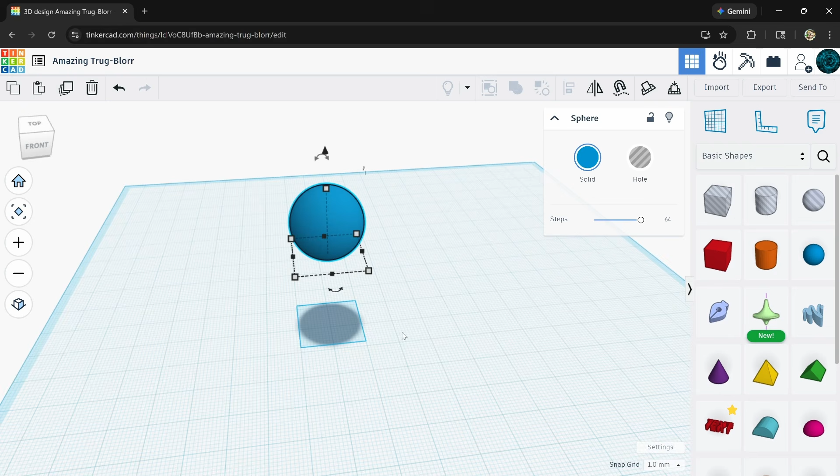Guys, I talked about it days ago, I want to make a new articulated joint. I've been thinking about it for a while but didn't think much of it. I don't know quite how we're going to do it, but it's going to mimic one we did months ago. We made a super cool articulated joint, a brand new one the world has maybe never seen, when we did that caterpillar. We've done a couple caterpillars, but the cool caterpillar with like 30 different joints was the best articulated model I've ever made.

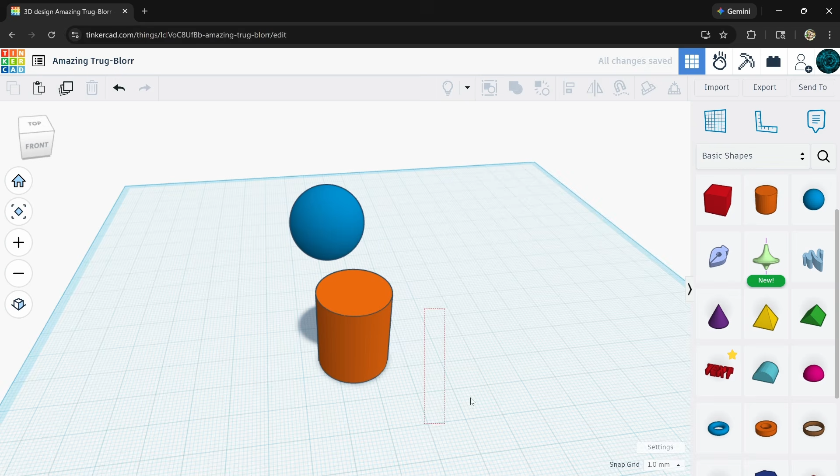We're going to do a similar type of joint, but that one actually used a cylinder for back-and-forth motion, side-to-side motion like this. We're going to try to make that same shape of joint, but using a sphere, more like a ball joint I guess. So why don't we just get started? Now that I did my announcements, everybody can come back. Everybody probably just skipped it.

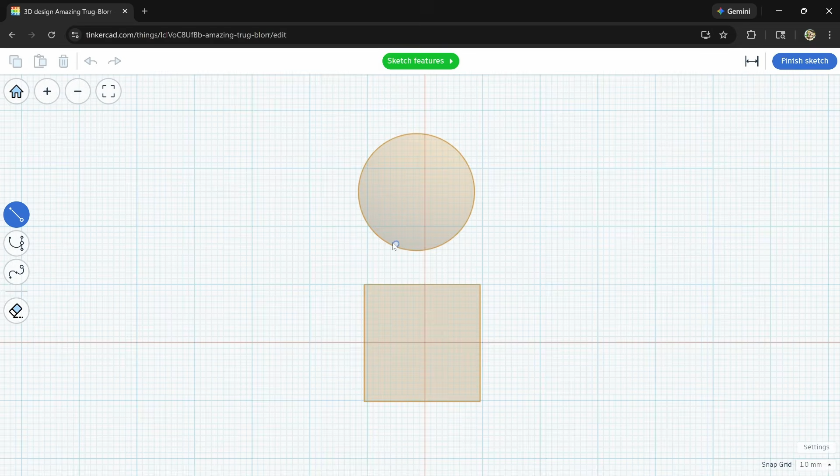Okay, let's decide what we want to do here. We have to make sure it's printable with no overhangs, so the bottom of the sphere is an overhang. Let's grab the sketch tool, let's see if it will help us out. I'm going to bring a temporary block down right here, and set the sketch tool on the side of it. We can use the sketch tool to draw stuff. I am so smart.

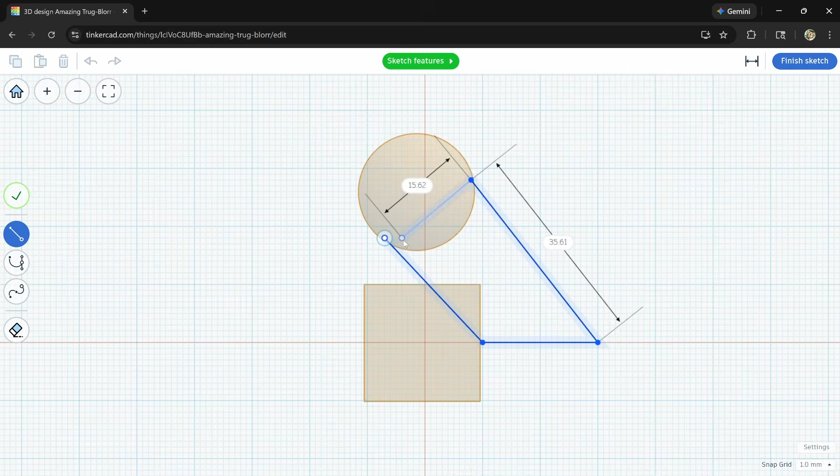Oh dear, okay let's just do stuff. Let's draw some support for the ball. Oh, but that support's going to have to be farther back. Okay, see, until I start actually doing it, I don't really know what I'm doing. Okay, let me move this back. And what we're going to do is cut some of the ball off, aren't we?

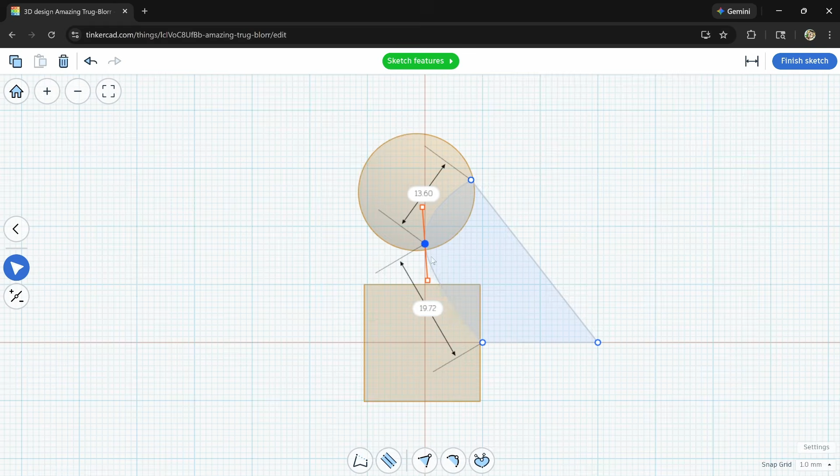Let's go ahead and hit finish sketch on that. I don't really know if this is what we want yet. Actually, let's add a little curve to it so it's more pleasing to the eye.

This could have a curve too. Let's just hit finish sketch on that once. Okay, so see, that can get installed on our joint. We'll align it later, but see that could go there, all right?

But see, this is an overhang right here. But we're just going to chop part of the ball off. That was part of my idea. So let's grab another sketch tool. This is one way you can make your own shapes to cut stuff off.

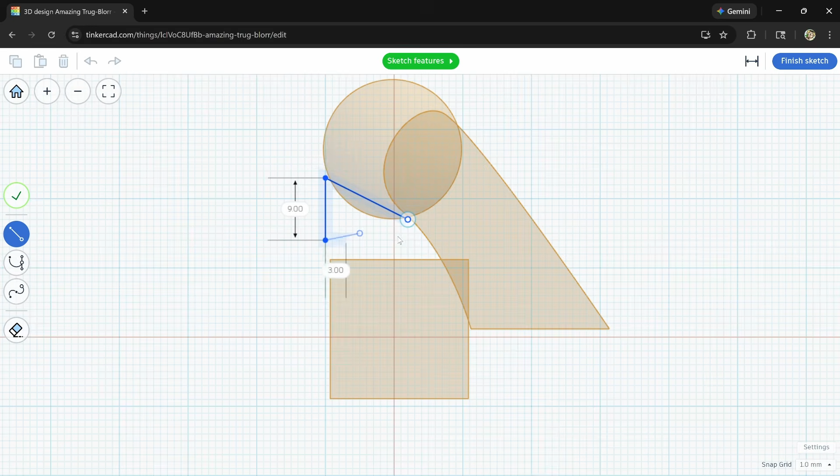Let's pretend we just want to cut. What do we want to cut? Yeah, let's cut from here upwards like this. Okay? So see, we're going to cut off this bottom part of the sphere. And all you have to do then, hit finish sketch.

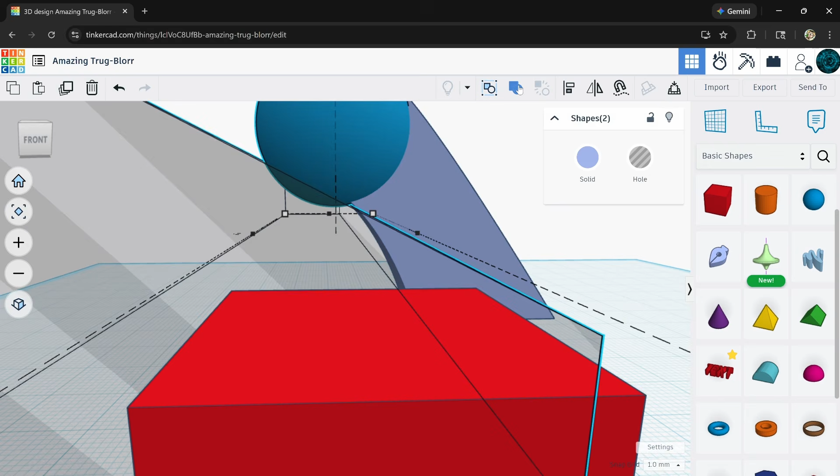Stretch this over past the sphere and turn it to a hole. See? It's going to cut that out just like we drew it. So let's group it with union, group it. See? Beautiful, beautiful. See, that shouldn't have trouble. That shouldn't have trouble printing.

Maybe this little part right here. So let's move the ball back. And let's align this now.

Yeah, I'm so happy. I missed tinkering. I have coffee, I do not. Well, I have a tiny headache, but it's fine, it's fine, it's fine. Maybe I should take some aspirin also.

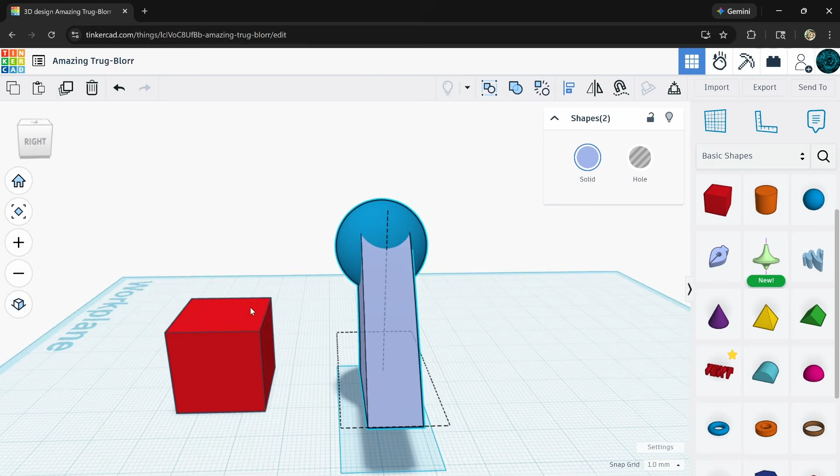Okay, are you guys seeing this now? We would have to lock this in. We want to make sure that this almost seems like it could be smaller, this part of it. Like a little more dainty, like that.

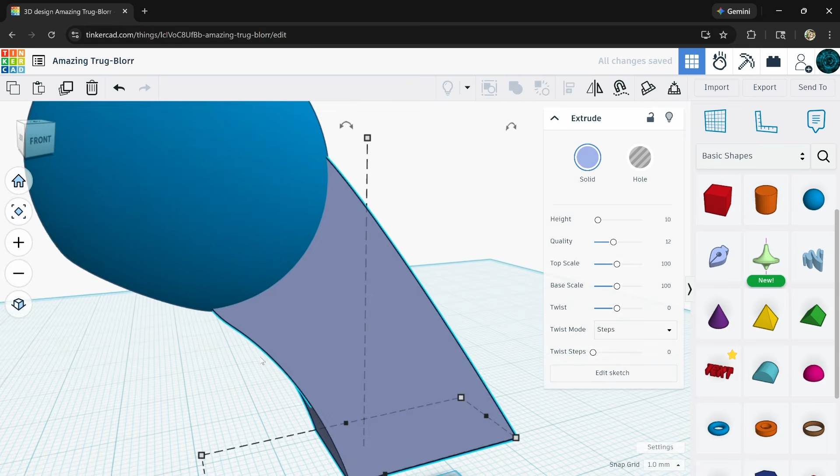I see no problems with that being able to print as a standalone, you know? Okay, let's hit D to drop it so it's on the floor. Okay, and then I just thought of something.

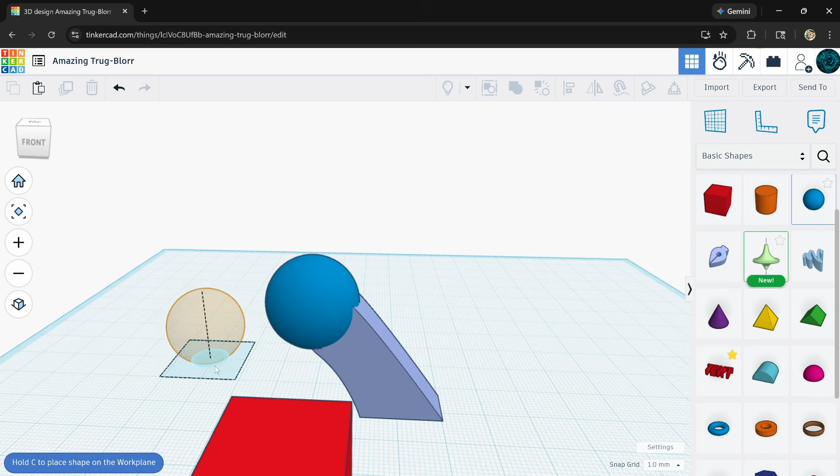Well, let's just grab another sphere, I guess. Let's grab another sphere. I should have duplicated that before we cut the sphere, but it'll be okay. Let's grab another sphere, make it a little bigger.

Like this. Oh wow, I don't even think I have to align it. It's already good. Okay, look at that, I aligned it without the align tool.

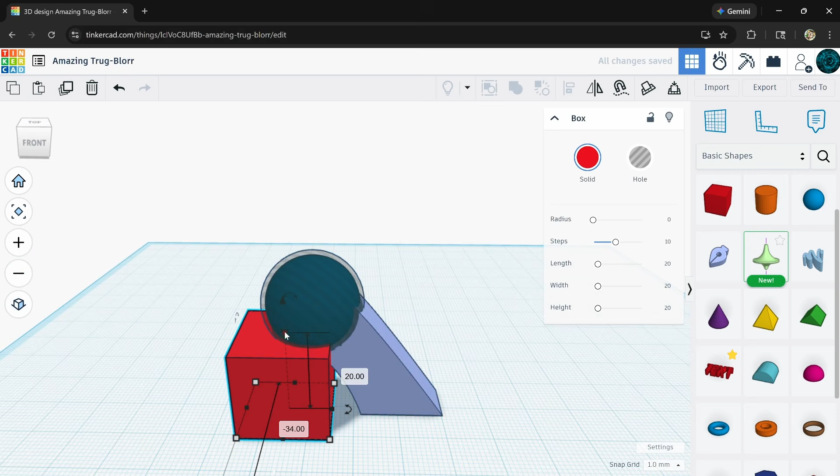Okay, so see, we're going to use that to cut into the object that's in front of it so the joint will work, you know what I'm saying? So let's pretend we're adding the joint to something like that. See? We're just going to cut into it like that. Well, here, let's just do it. We're just showing an example.

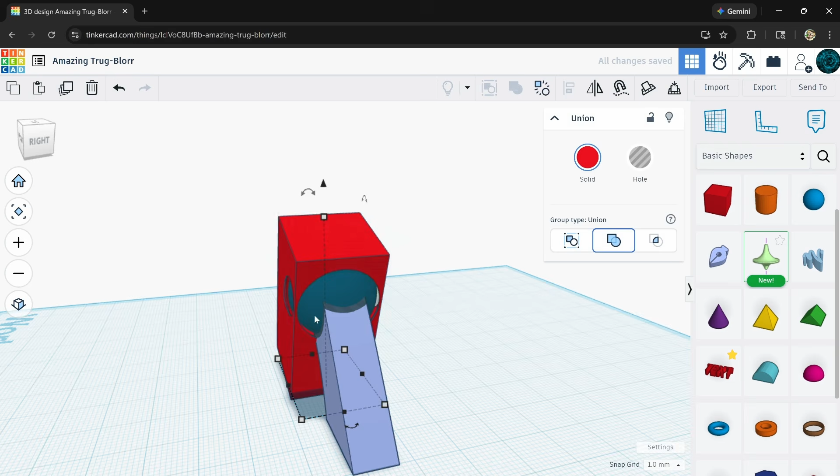Let me duplicate it here. Okay, so group, see, look. That's almost a working joint, because we have it a little screwed up. But see, you get what I mean. So see, that would move in there and we'd be all good.

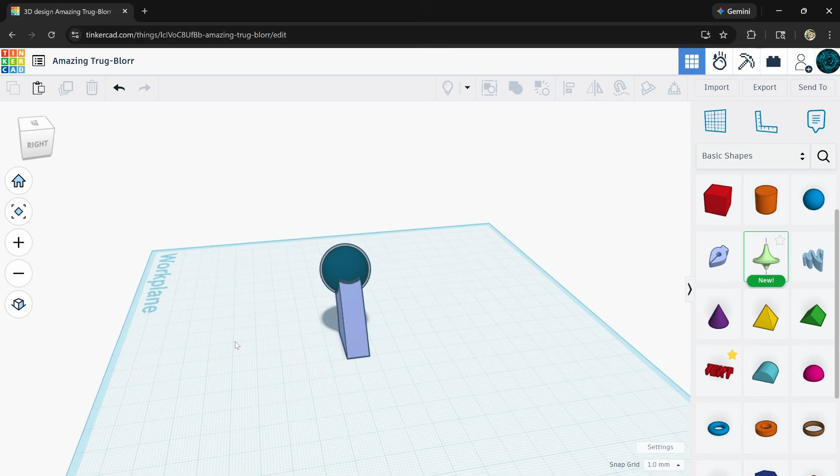So I think we're good then there. We could also, I want a pretty big footprint on the bottom, because we don't want it to pop off the print bed, you know?

Okay, so now let's make a shape for it to go into here. So we got that part done. So what kind of shape do we want it to go cut into? I don't even know what we're making. Are we going to make like a lizard or something?

I always wanted to make a slug. That's not much different than the caterpillar, though. Let me think of what we're going to do here. It might take some futzing around. I don't really know.

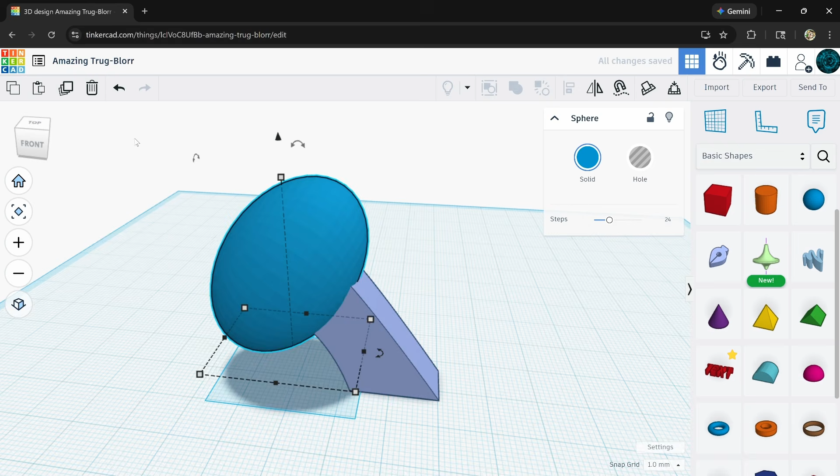Something like this could work. We got to be on the ground, though. What's cool is when you come on here without a plan, brand new cool things can happen, you know?

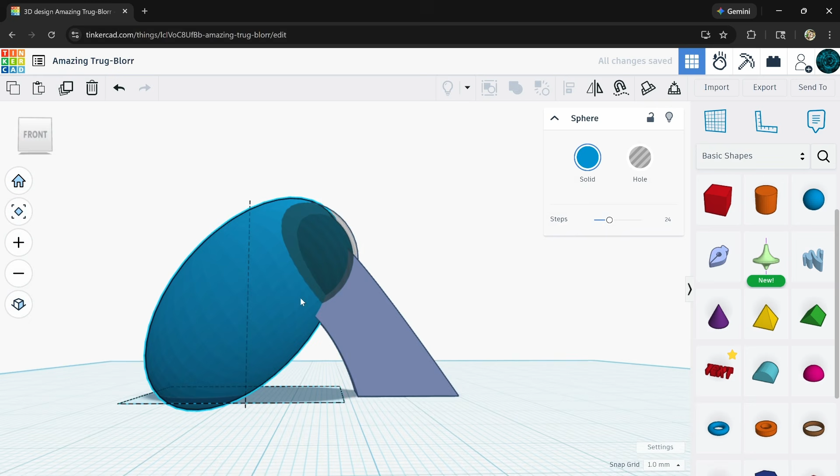See, what if we had it cut into something like this? That would need a flat spot. Okay, we'd have to get rid of some of that. Would that even kind of work?

Can we just, let's align it here. It's already aligned, wow, everything's behaving. We're going to hit the back button, but let's just group it and see what it looks like. See, we'd have a problem here, but

That would slide right out, wouldn't it? So we need it to come around a little more. Okay, no problem, I know how we can do that.

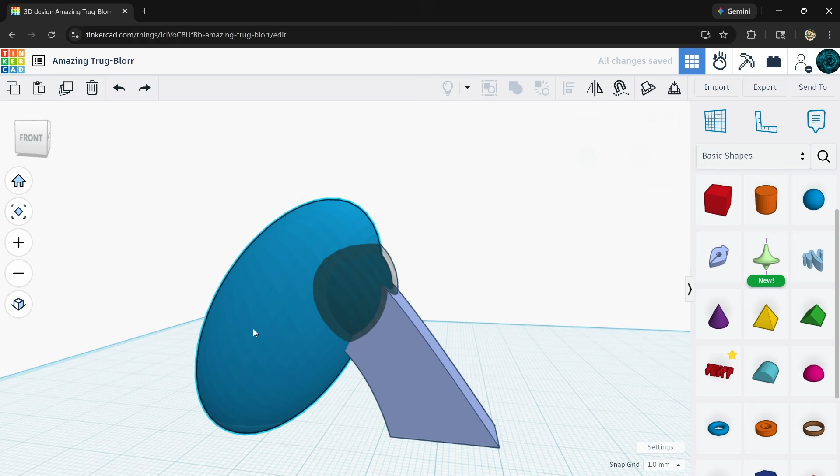We can just go like this. Let's duplicate this sphere. Duplicate. We're going to bring her on up. I could have just grabbed a different sphere, you know what I'm saying? Why don't we just do something like this?

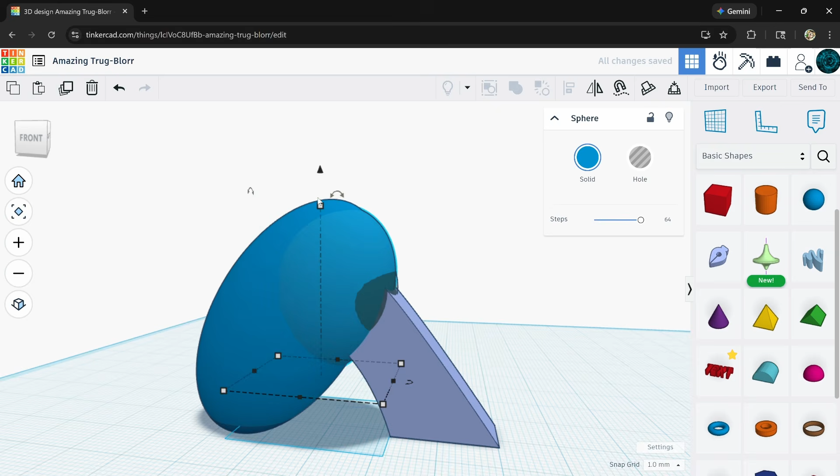I hope something cool, I hope the thumbnail's cool. What did I make? Can somebody from the future tell me what I made?

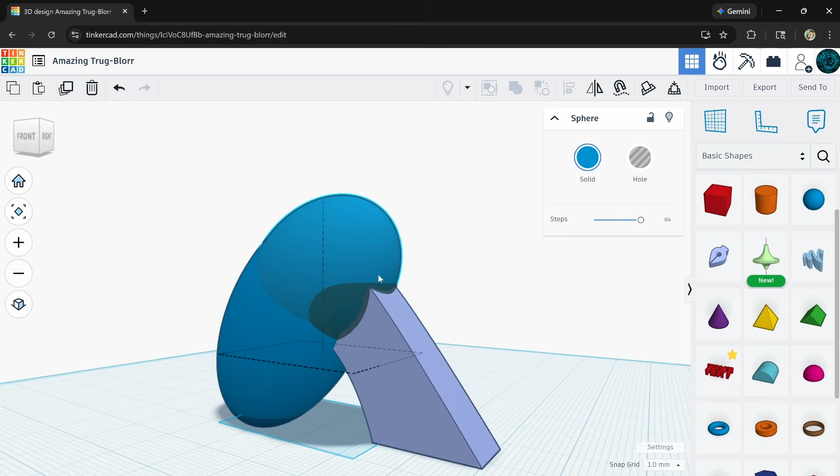Okay, let me do a little time lapse. I'm gonna screw around with a few things and figure out what we want to do with this, how we want this joint to fit. Okay, that wasn't much of a time lapse because I think I kind of like what I got.

Was all this stuff centered when I did that? It was. Okay, we got this shape. That ball can't pop out of there.

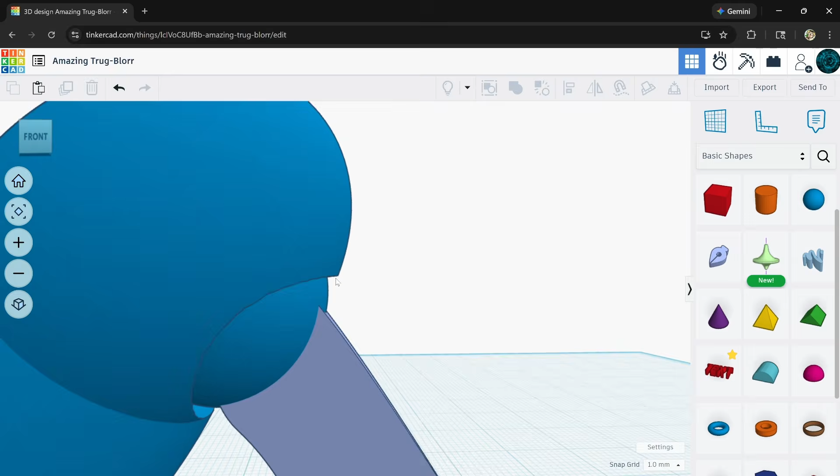Little bit of an overhang. This is gonna print a little weird up here, maybe. Might print a little weird at the top right there. So now, what if we just do this, guys? Duplicate, slide her on back.

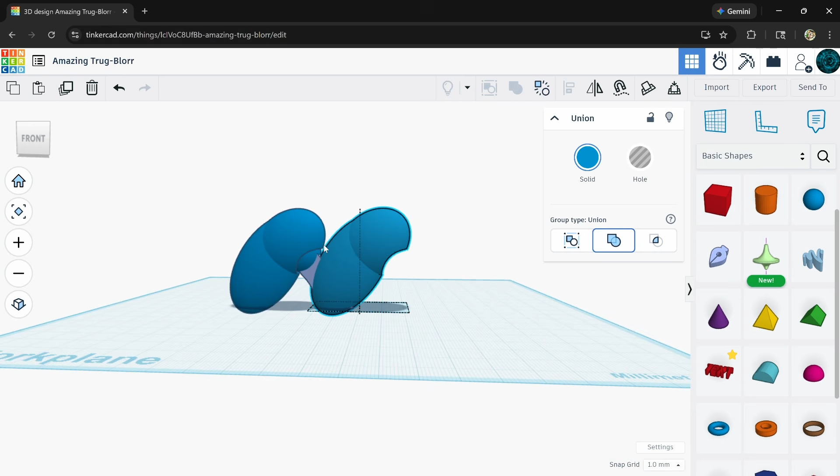I take that back. Wow, we'd have a weird thing happening if we just did this. You know what? We're going to try multiple things because I don't even know where this is going yet. But one thing that is already cool is this.

This is a completed joint right here. We could line these up and, besides chopping the bottom off, let's add a little more bulk to the bottom quick so it'll stick to the bed better. You know what I'm saying?

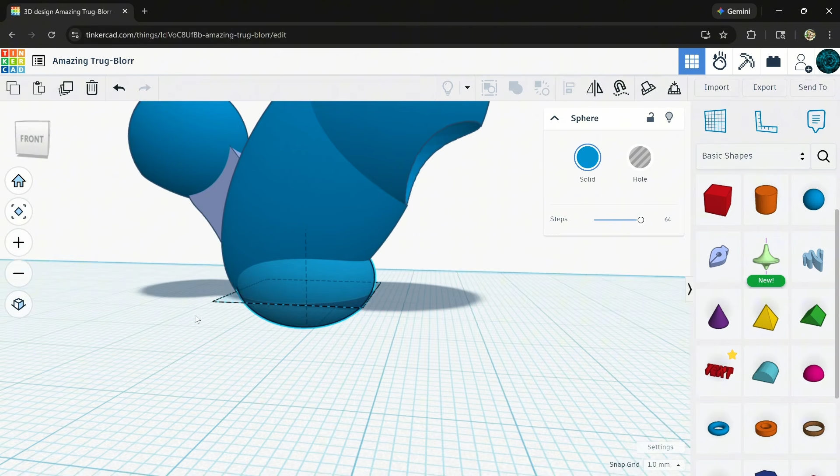This is funny, I don't even know what this is. Okay, and then we would chop it off, but maybe we don't need to yet. So you get what I mean. This even would be a repeatable joint for like a weird looking snake or something. Let's just see what it would look like.

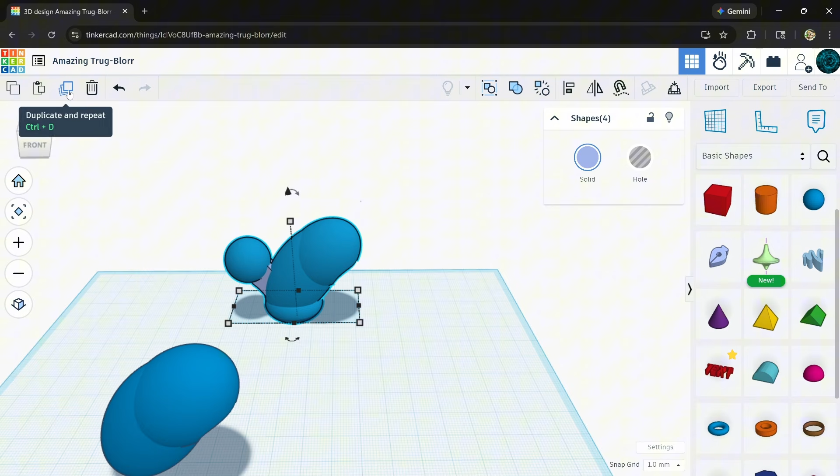See, we just duplicate it, slide it back till it fits. Which is right there. Yep, and then watch. You know, we could just keep hitting duplicate. See, we made a really cool...

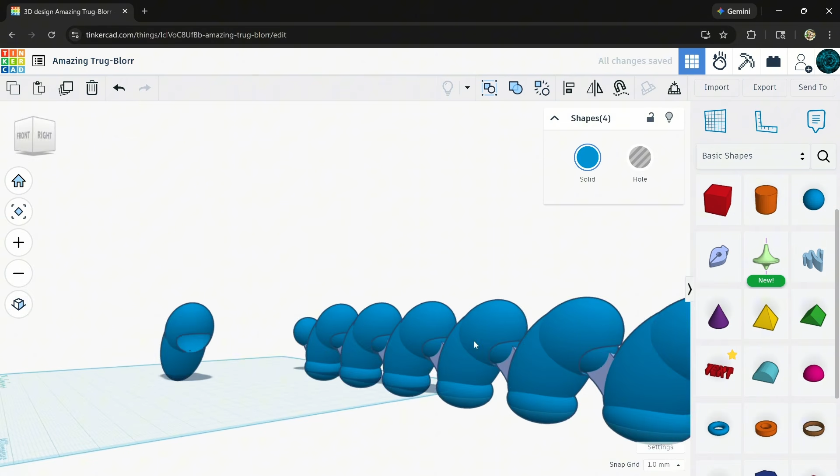That would be really flexible. Oh my gosh, these would turn all the way around. Oh, that's goofy, these would all spin like all the way around. That's cool, I wonder what we could do with that.

But see, you're kind of seeing the joints kind of exposed. I wonder if we could do something else so it's not so exposed. So let's keep that weird chain for now.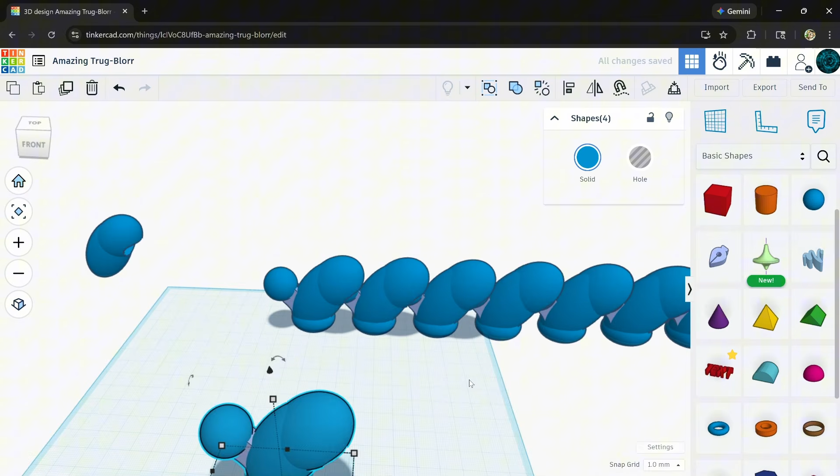That might even be cool to print to see how it feels and moves. It's literally going to like spin. Interesting.

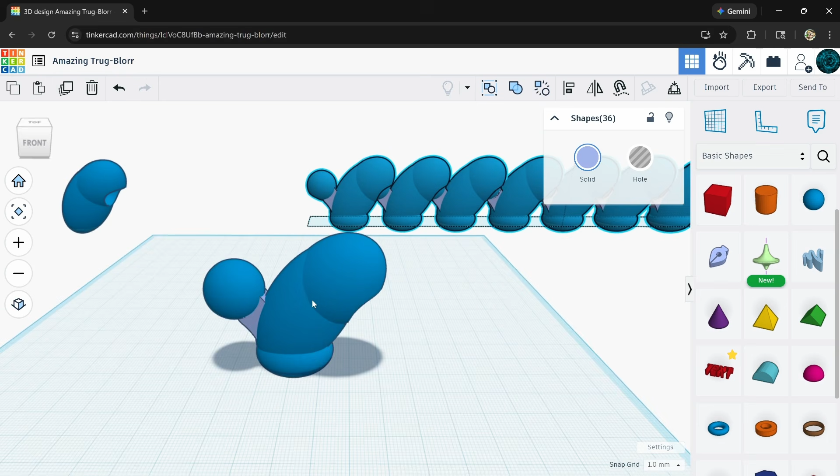Okay, let's do a little, I'm going to do another little time lapse where I try to fit this together in a different way, and we'll see what happens.

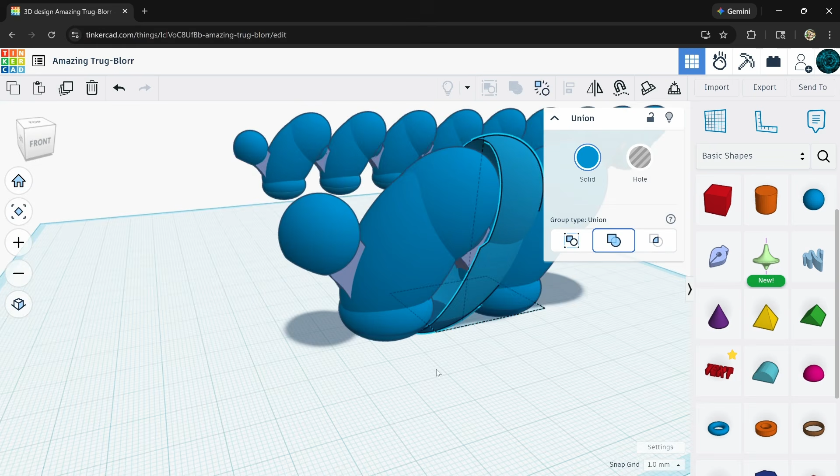Okay, we're getting really weird now, which is good. That's always a good thing. How skinny is this thing? Okay, no, that's good. Are you guys seeing this? It looks weird, don't it? So look at how goofy this is.

This is technically another one. This hides its joint a little bit more. Let's try it out, let's line it up just like the other one. So just duplicate it, slide it over till it's where it's supposed to be. Uh-oh, that's harder to see.

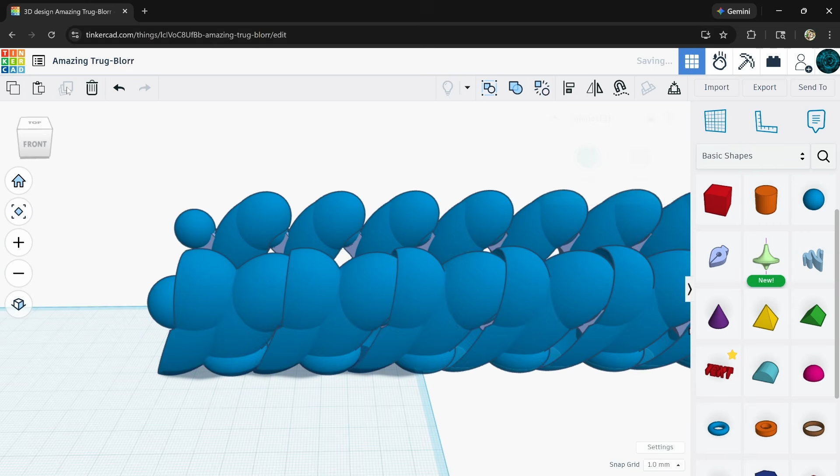I think right there. And then keep hitting duplicate. Whoa, weird. Wow, that is really weird, nobody's ever made anything like that. See, that's why we come on here with no plan. But is that cool? We don't know.

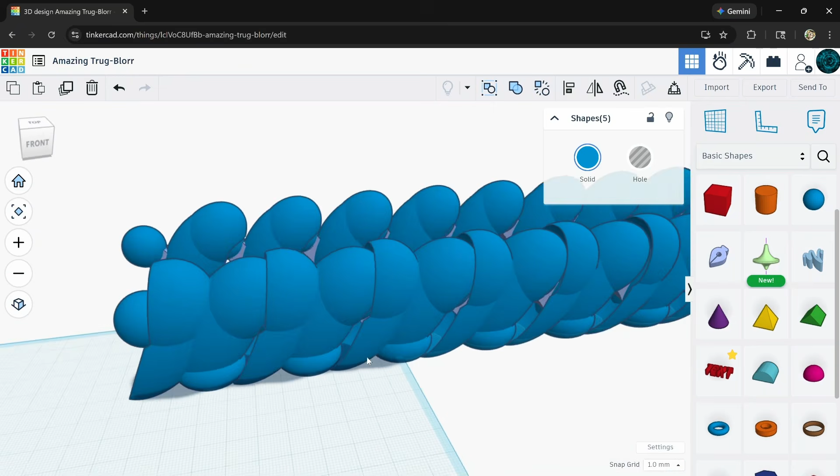Wait, are these touching? They are not touching. Oh my gosh, we almost have to print this. Should we call it rope? So here, let's get rid of this. Oh, I mean, set it over there.

Let me take a look at this little thing. I feel like I don't want this to be the only finished product, though. Maybe we won't do a full creature, but we should test out. We got to test one of these out for sure.

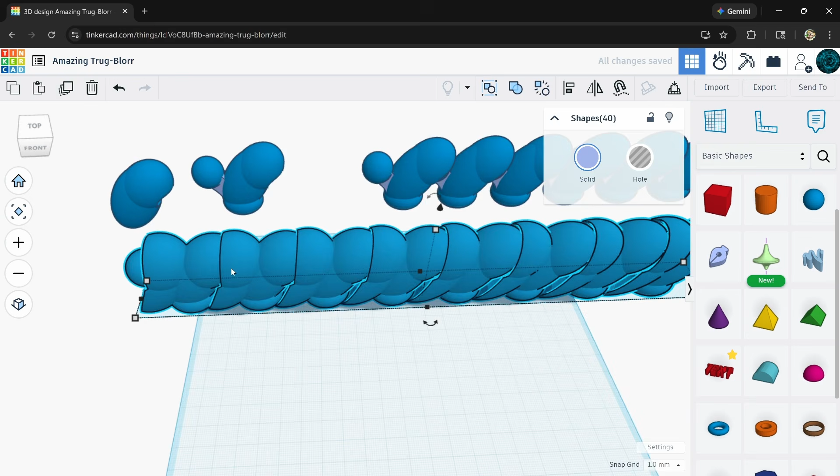This one, I really want to see how this moves. This would spin all the way around, too. It might almost have too much movement. Every joint would be able to spin all the way around. But is that good or bad?

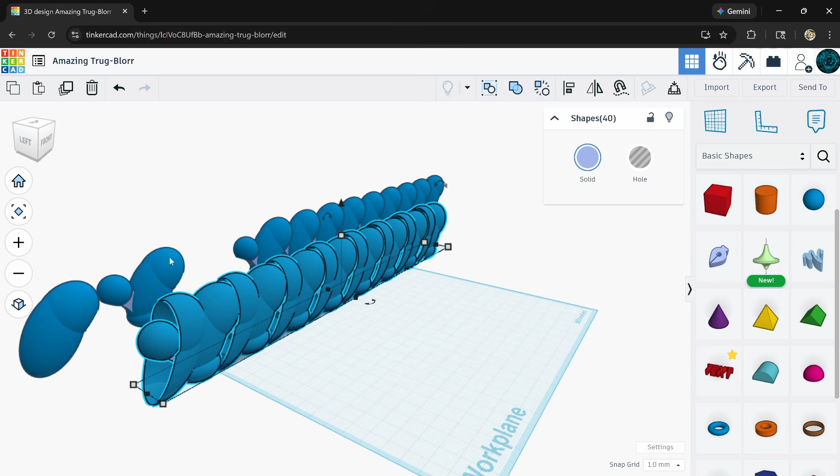Maybe that should give us more ideas. Knowing that that's how this joint's going to work, maybe we should take that to our advantage. Okay, let's do another one. Okay, let's think of something else to do. I will speed this part up too.

Oh my goodness, please tell me you're seeing this. What am I doing? This might be awesome. Okay, so what would we do? We would... okay, so let's cut this into this.

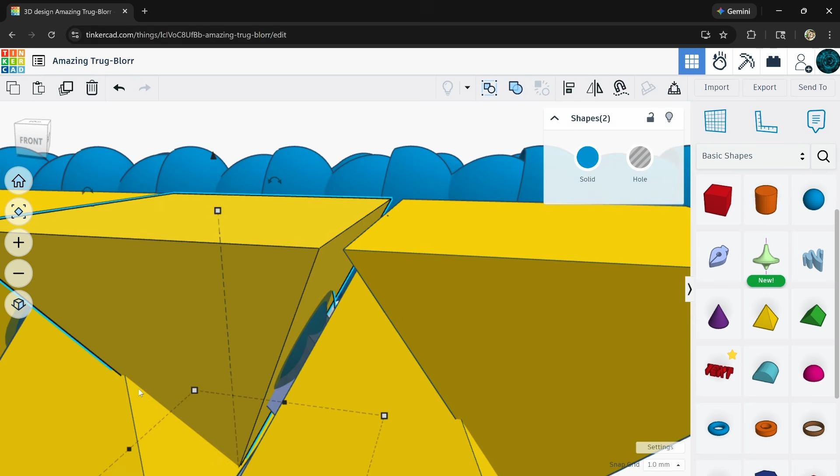Select this just in case. Okay, so we have our hole cut there, which means we could delete these. Whoa, wait, whoa, okay, get rid of that one. Wow, this might be crazy.

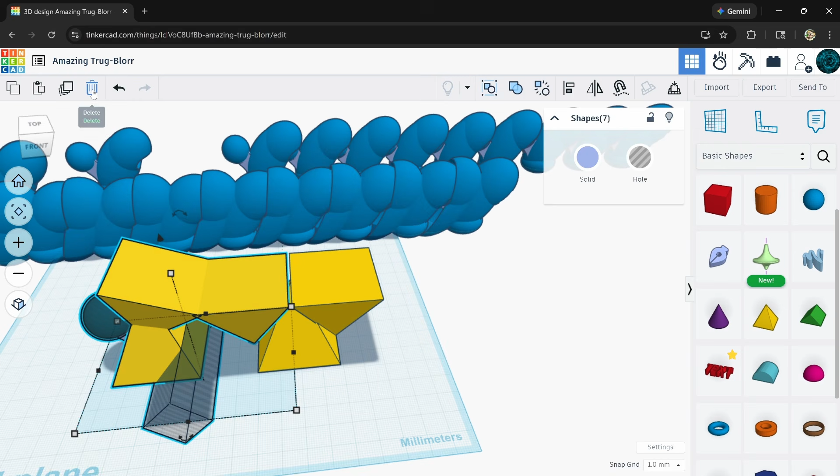If it spins all wacky, it'll be more like a fidget toy or something. I don't know, so what would we do? Delete these. Delete this. There, oops, I think this is a finished deal.

Let's have a look. Wow, it's got a big, huge footprint. That's actually really cool. Okay, so watch, if we just duplicate this, same as like we did with the other, and bam. Oh, it's hitting in there. Oh, duh.

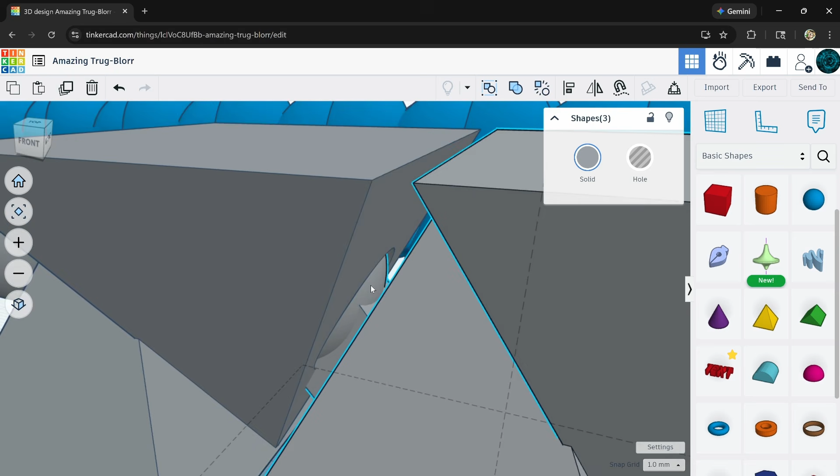Okay, I have to fix that. Okay, this is hitting a little bit, let me fix that. Is that all I had to do is slide it back a tiny little bit? Or is that going to fall right out?

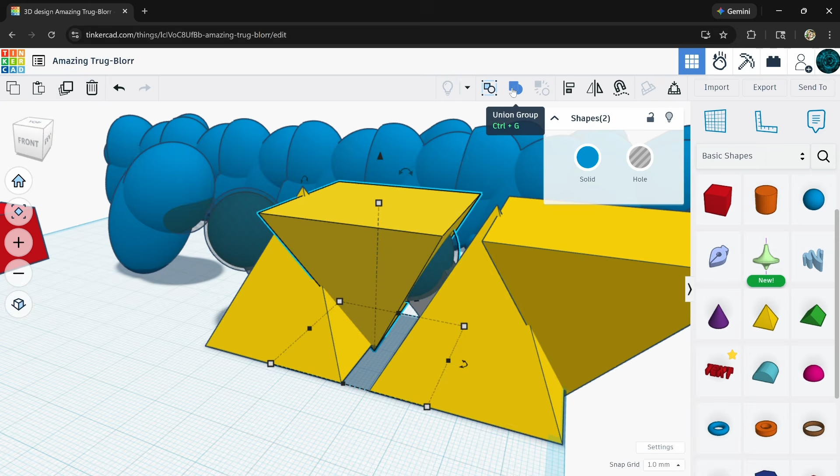We could check it, so let's cut into this. I started doing all kinds of crazy stuff, but maybe all I had to do was... oh wow, is that all I had to do? Let's check if it's going to hit.

So we can turn this into a hole, and let's check if it hits. Whoops, let's move this all as one.

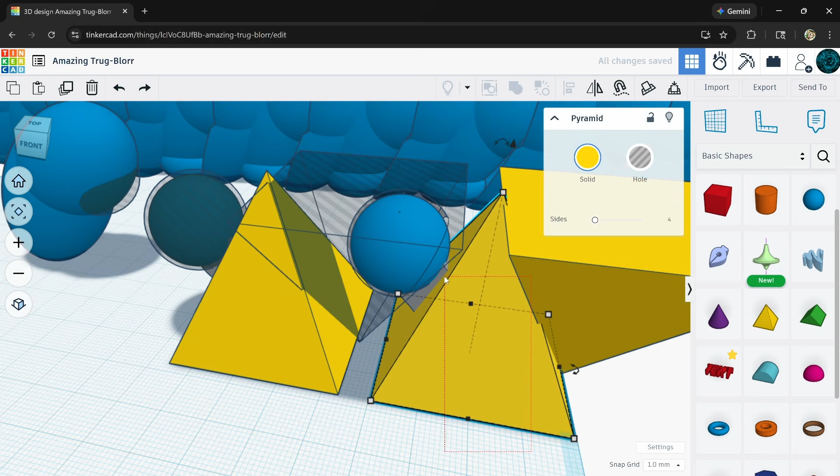Okay, oh, just barely though. It doesn't look like it could fall out, but it's a little bit of a close call. So let's make a quick change, let's make this a tiny bit smaller. Let's make our movements 0.5.

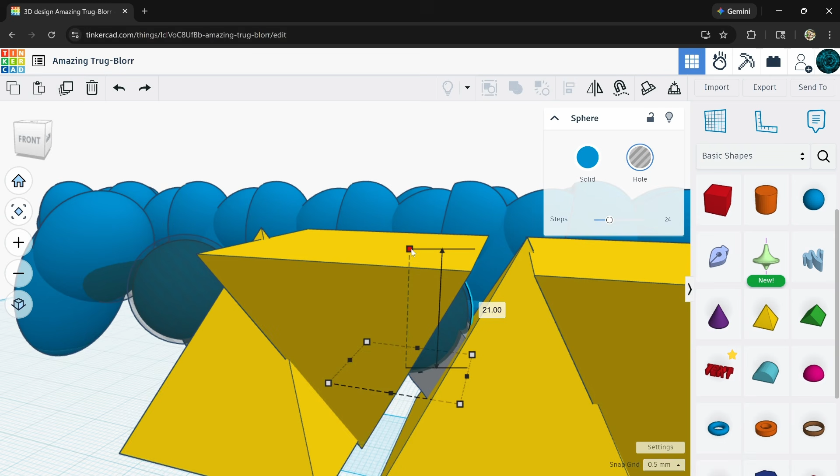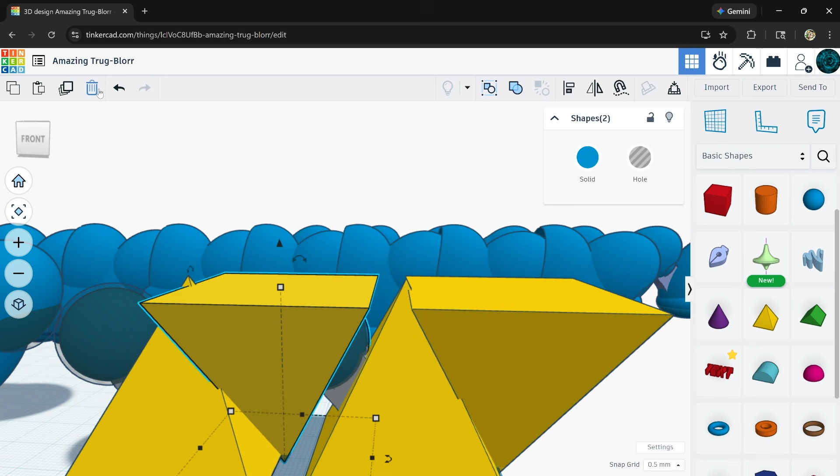Let's do that. Is that still... Okay, yep, that's okay, hopefully that'll give us enough clearance. Okay, let's cut it into there. We might be done, guys. Cut. Okay, that's not going to fall out, and that's going to be able to turn all the way around.

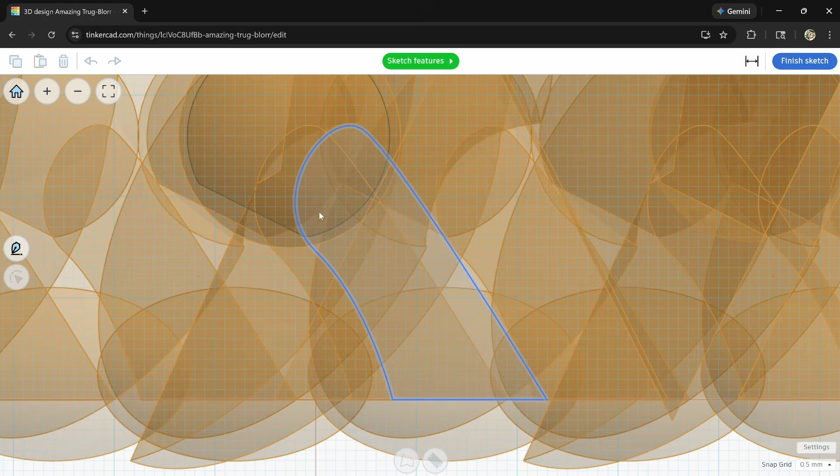Oh yeah, we can make a slight change to this. Let's go to Edit Sketch. It looks complicated, but here, let's bring this up half. Let's just pull this back a little bit like that.

Beautiful, beautiful. Oh my goodness, guys, that was a little wild. Oh, see, no wonder my head hurts, I'm thinking too hard. We got this.

Okay, let's line this puppy up and see what it looks like here. So delete the stuff we don't need because it's in my way. And did we cut already? Oh yeah, we did, okay, get rid of that. Okay, so this is a finished object that we can...

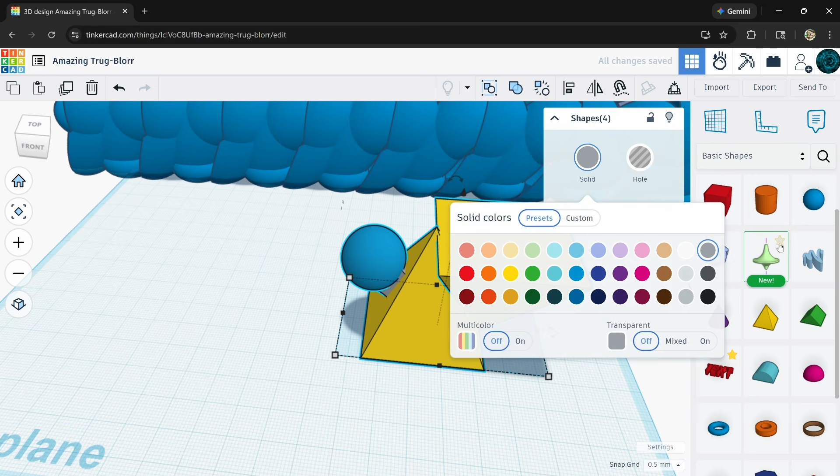Can't we make it all one color? What the heck, let's just group it then. There we go.

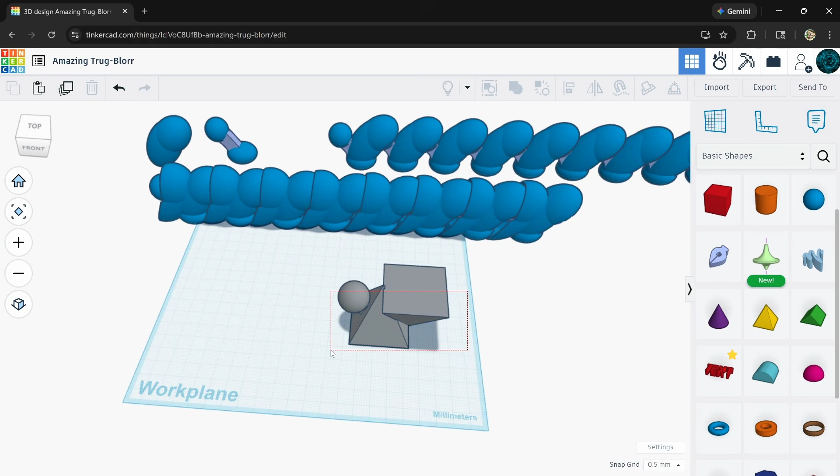Now, is that going to spin really cool like a weird fidget toy? I'm just trying to picture what applications you could have. There's going to be a flat side on each side. Could we make it into a calculator? You could have numbers, there'd be numbers that you'd be able to spin. Can we use it as an abacus, guys? I have no idea. Okay, let's try it out here though.

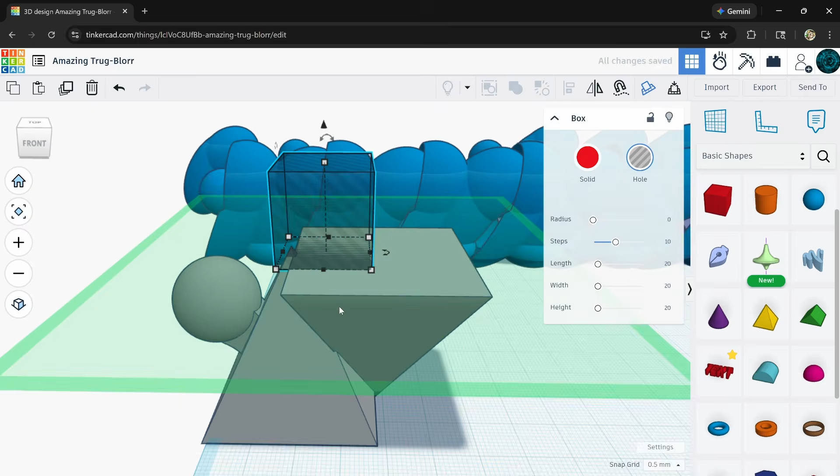See, we'll just slap it back like this. I think we should cut this triangle. Oh yep, let's do that. We're gonna cut this little tip off right there, don't you think? Yeah, you think.

Groupage. Let me see how long I've been recording. 44 minutes, a lot of that's going to be a time lapse, or I mean some of it.

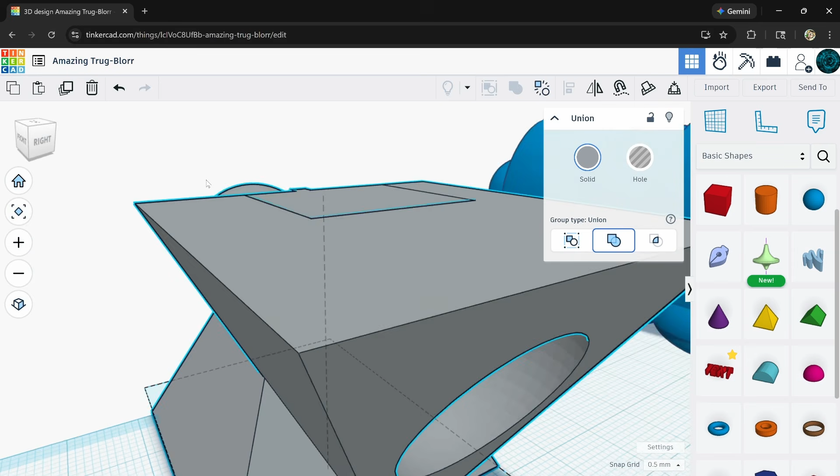What the heck, why is there so many lines? Them are imaginary, right? I don't trust that, why does it look like it cut into it? Let's... Oh, it's flush, that's imaginary. Here, we'll just go like this. Ah, smart, smart, smart. Okay, group.

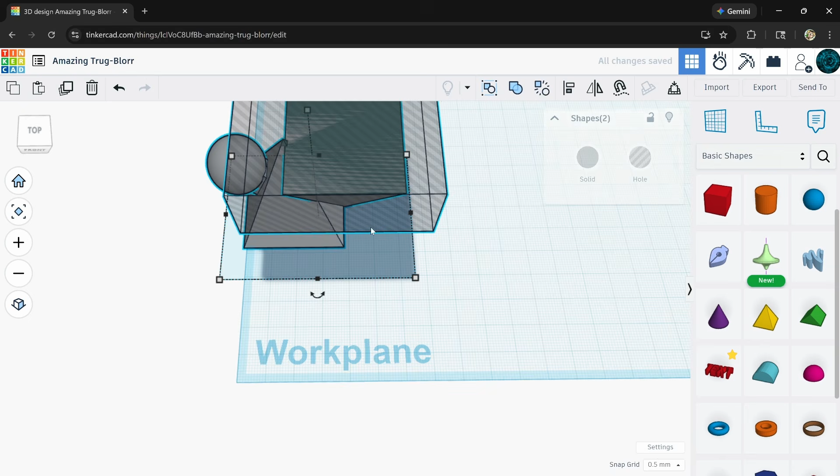There we go, guys, have you ever seen one of these before? Oops, we got to cut that little bottom one off too. Let's just duplicate this, hit D to drop it. Pull it down like this. See, we're going to cut that bottom off now too. Okay.

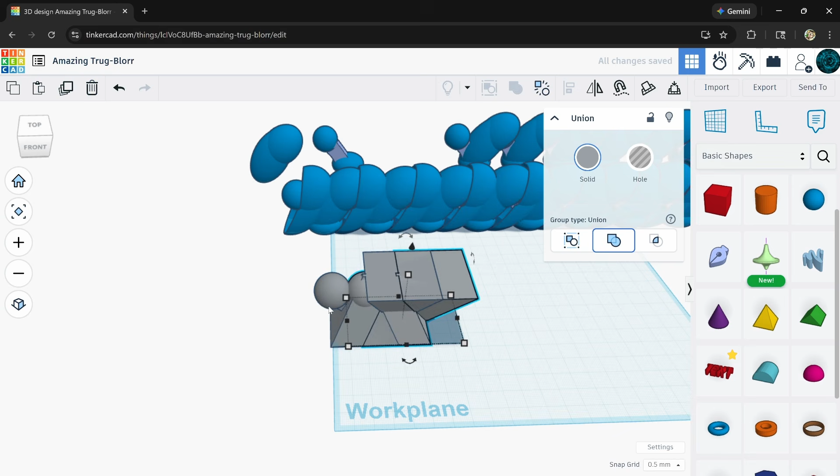Wow, these are weird, okay, let's see what it looks like lined up now. Can we use it as an abacus? You probably could if you strung some together. One step at a time, guys. Let's see if it even... We got to print some of these and see what it does, you know?

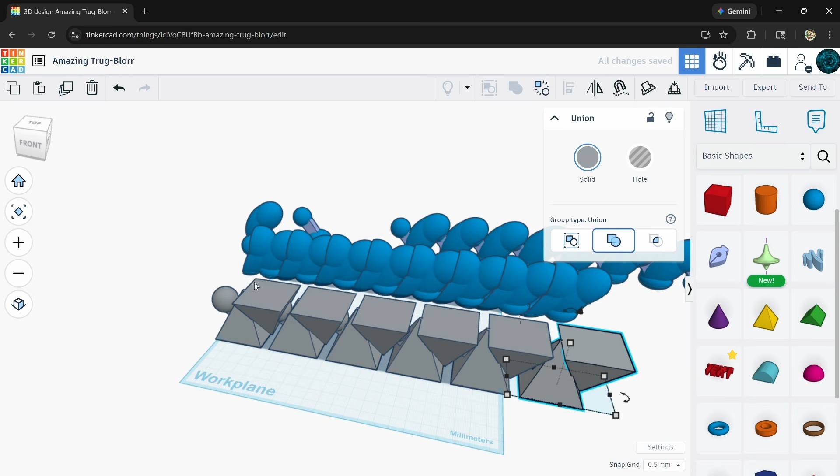Okay. Wow, that looks tight, is that it though? Let me hit duplicate a few times. Okay, that's really cool though, I mean, for one thing.

Let me do one more as our... let's save one over here. Let's have a look inside here and see if it's hitting. Oops. Oh man, it's not hitting, but...

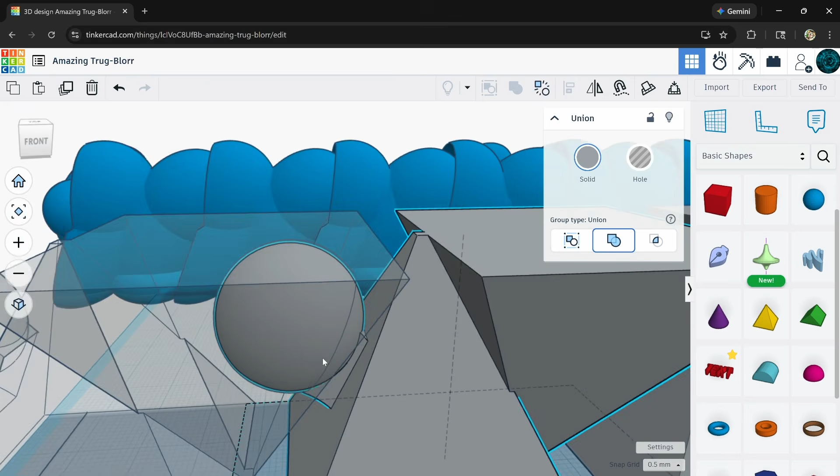That's way too close. It's way too close, isn't it? It needs to be looser than that, doesn't it? Okay, let me get it a little more gooder.

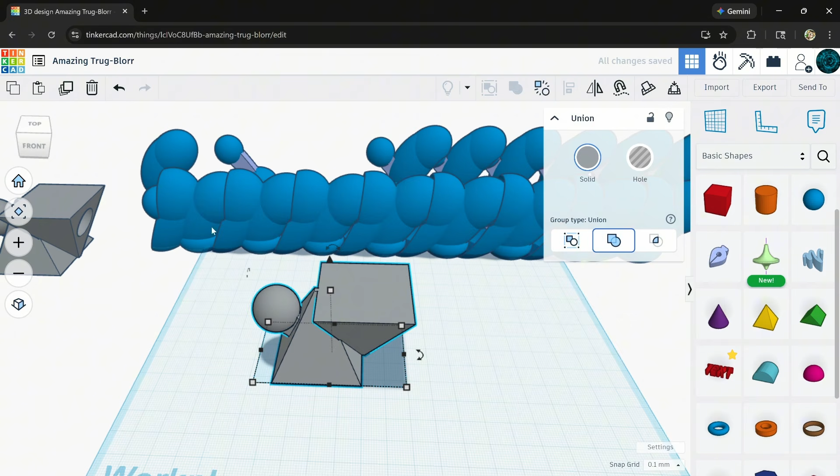Okay, let's have a look at it now. I like the gray look for some reason sometimes. I just made the little cutout a little bigger, like the hole right here. Oh yeah, I was gonna make it transparent. Crud, here, let's start over.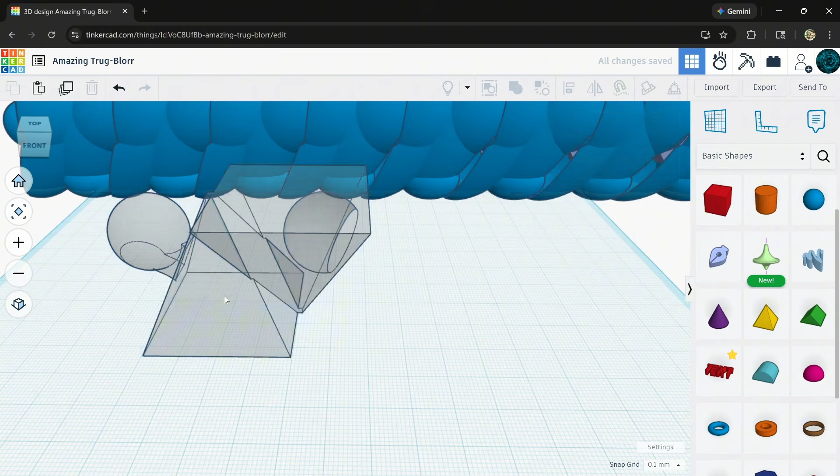Okay, let's make this transparent, because see, I don't know how far to slide it back. So now we can hit duplicate, slide it back, and see, we'll be able to see when to stop.

Oh my gosh, oh, that looks gorgeous. Look at how much space we have. And I checked, it's not going to fall out. We hope, but that's why we test it. Look at that, guys, here we go.

Keep hitting duplicate, boop, boop, boop. What should we print, just, how about 5? 5 links? Yeah, okay, let's turn them back solid, hit S.

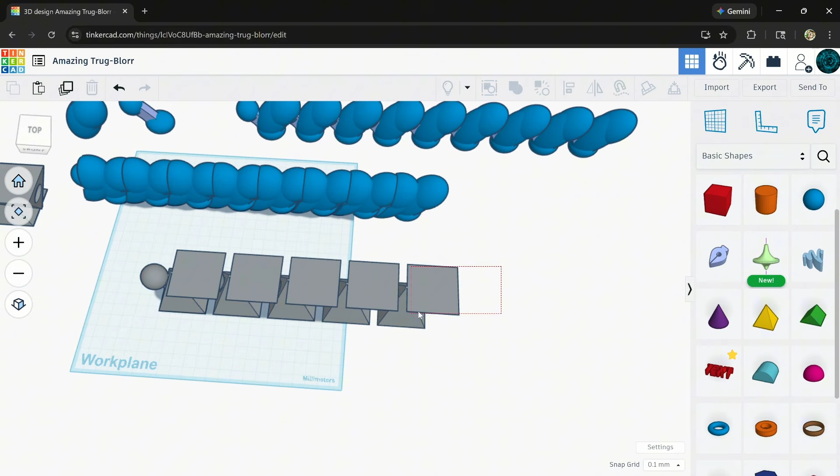Yay, we did it, what did we do? We did something, let's keep one of these. We're going to get rid of this one, we're going to get rid of these. This looks a little explicit, like somebody might think that's something weird.

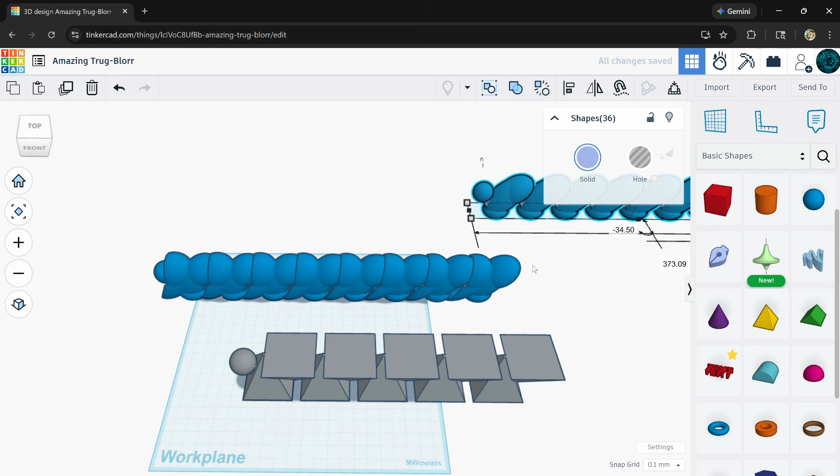We're still going to keep that, but we're not going to print that. Let's grab a few links of this. Don't you think we should check this one out too? We don't need that many links of it though.

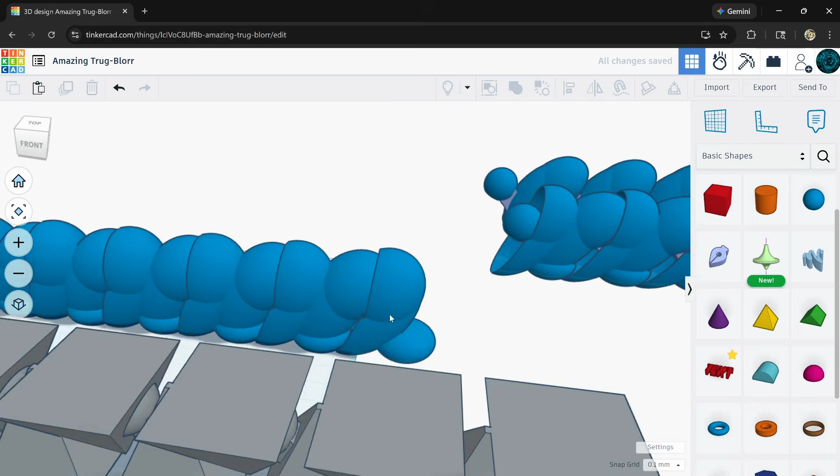Can we just duplicate some of this? Or delete some? So like that, I guess. But then this ball, you wouldn't need this ball. I don't know what to do on the ends, let's just not worry about it. Let's cut off the bottom.

We just got to see how these things act, you know? These are new concepts. I want to see how they act as far as movement. Would they work good for joints of creatures, or for snakes, or I don't even know. Okay, this one we got to chop off.

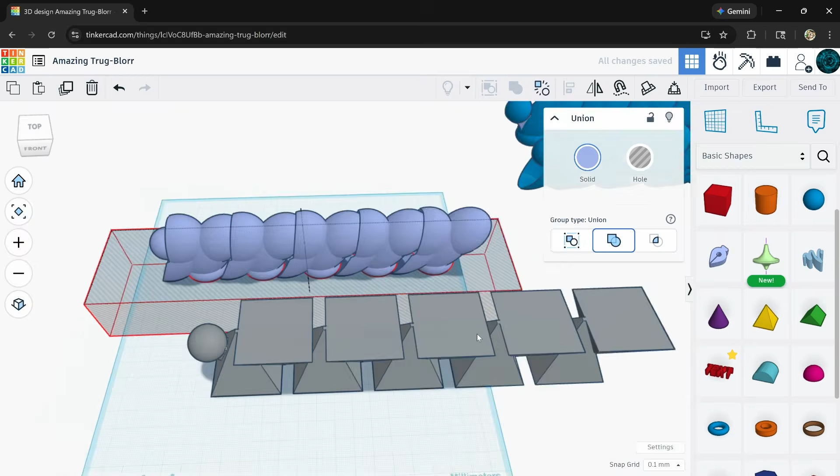Okay, let's hit group. This one we just have to scale down a little bit. Hold shift so it doesn't change its dimensions. There we go. Wow, this is weird.

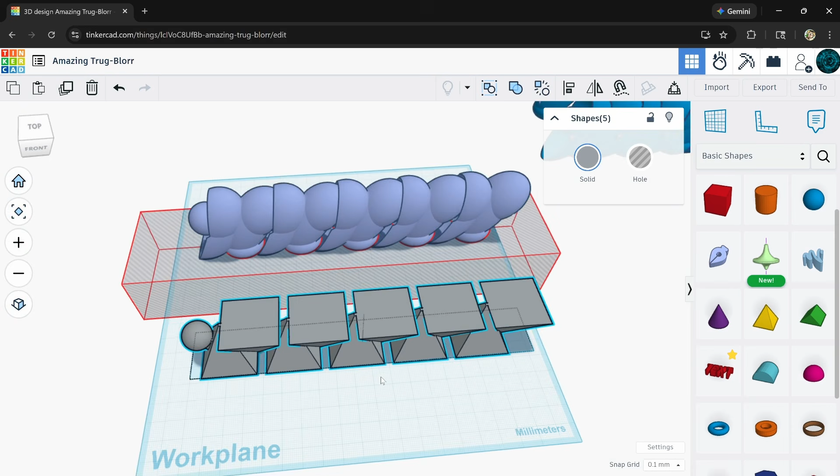I hope one of these is cool. I think it's pretty cool, like pretty neat. We are pushing our luck right there with that. I think we're okay. I could have gotten that out of the way a little more.

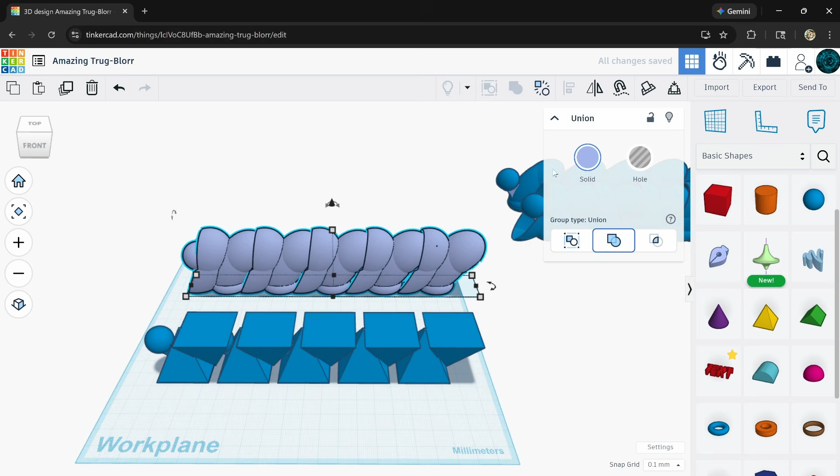I think there's only one thing left to do if it ever groups. Is this one okay? Yeah, that's okay. Please group, hey, and listen to me. I want it to be a better colors. I'll have to think of what to do for the thumbnail.

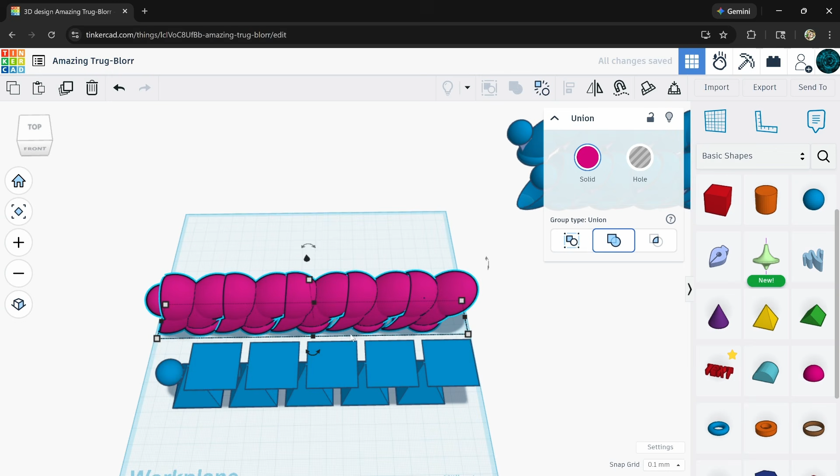Oh, this is just lively. Lively, there we go guys. Does that fit on the printer? Just barely, scale it down a tiny bit. We want it kind of big for the first test print to see how these act. So all right guys, there's nothing left to do except send it to the printer.

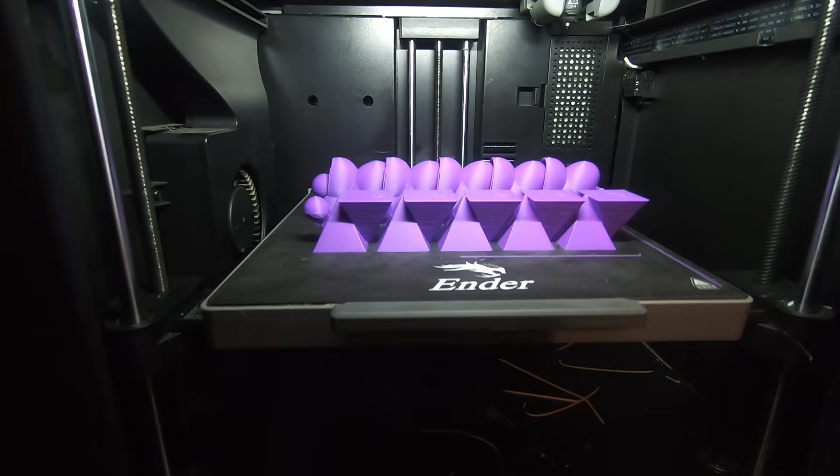Hey, here we go guys. This is actually the second time I had to print it, it's the next morning. The first time the filament ran out and the sensor didn't pick it up, so it just stopped printing. Dude, I've never printed with purple before. So actually, you channel members bought this - I bought a 10-pack a while ago of different colors because it's a lot cheaper to get 10 rolls at a time, and purple was one of the rolls, and I've never used it.

Okay wow, the first thing I noticed - how did we not notice the little void where the ball joins in is slightly sticking out the top? See, there's a tiny hole in the top. I'll have to raise this pyramid shape up a little bit.

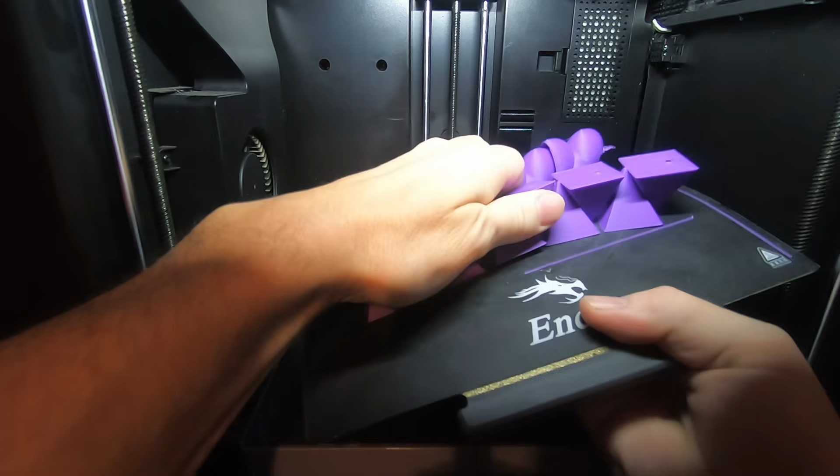Okay, moment of truth - is this stupid, or did we make... the main thing is, oh my gosh, it already is super loose. It's not going to fall apart, is it? Oh my gosh, what? Okay, let me see if it's going to fall apart. Oh my gosh, this is fantastic.

What? I don't know what the heck it's good for. It is super cool though. Oh my gosh, I love it. See, this is what I meant when I kept saying all these joints are going to be able to spin all the way, so it's got a lot of movement.

Oh my gosh, here let me see. Oh, there we go, what the heck? It's super cool, it's about what I expected. Here, let's see, could we make it form all the way into a circle? No. Can I get it back how it was? Okay, like this, like this. What the heck? Okay, I like it.

I don't know if it's... I don't know what it's good for besides a fidget type of thing, but it's really cool. Okay, let's check out the other one - this is a goofy looking one.

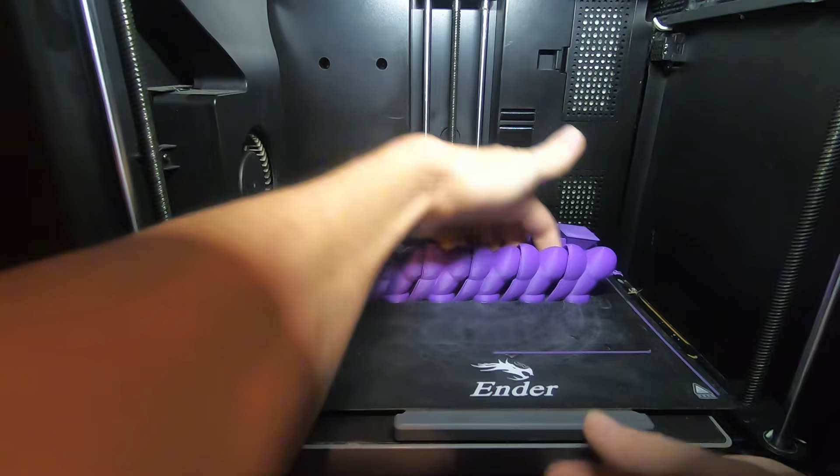Oh, it's not moving yet. Oh, now it is. Wait, some of these are locked up. Oh, it just needs a little... whatever. Hey, okay hold on, let me get this one worked in here.

See how nice that moves? And look, from the top view, you actually don't see any of the parts of the joint. This view, the joint's pretty much completely hidden. Wow, it's really goofy. I guess my favorite, I like both of them, but as a fidget thing, this one is definitely the coolest. It's really goofy. I wonder what would happen if it could connect all the way back around.

Oh my goodness, all right guys. Well now we have another weird articulated joint that we can add to our arsenal when we are making creatures and stuff. So it was really fun, and hopefully it inspired and gave some people some ideas. We'll leave it there, and we'll see you guys on the next video. All right, bye-bye.